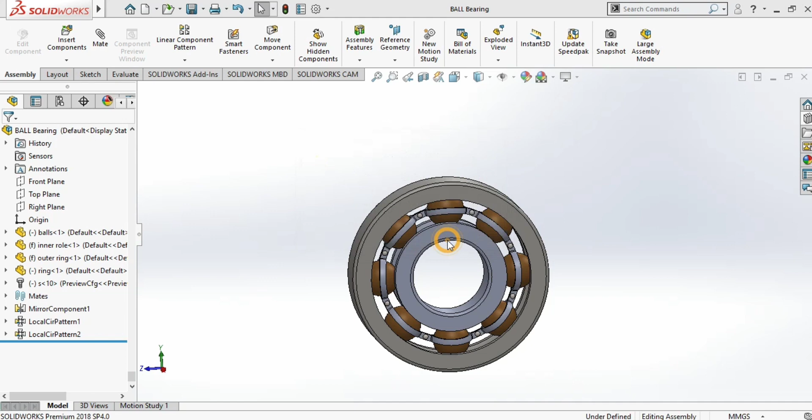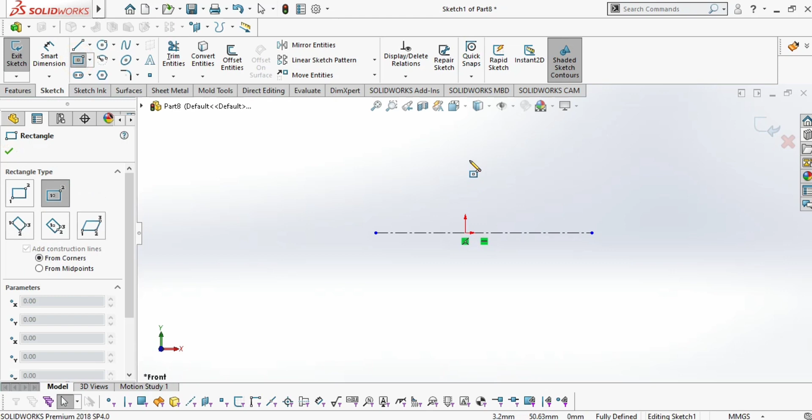Part. First I am choosing the front plane, then draw a center line. Then I am going to choose the center rectangle, give the relation vertical. Okay, then choose the smart dimensions.

This length will be 53, and the upper length will be 65, and the total length of this rectangle will be 31.

In this we have to revolved boss base. First there is a revolved cut in the inner side. For this choose first center line, draw a center line, then go to the center point arc and draw an arc, then go to the smart dimensions.

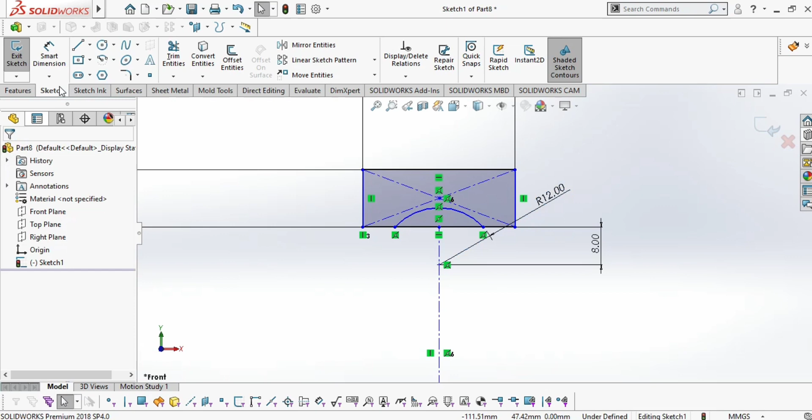This length will be 8. The radius of this curve will be 12. Okay, then trim the inner side portion and make relation to these lines equal and horizontal, then click OK.

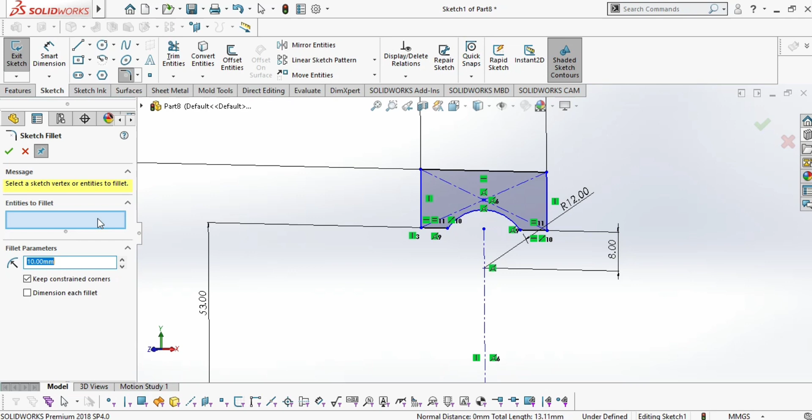Now we can also use fillets of 2.1 on these two upper sides, then click OK. Now exit the sketch, go to the revolved boss base and then give this axis, then click OK.

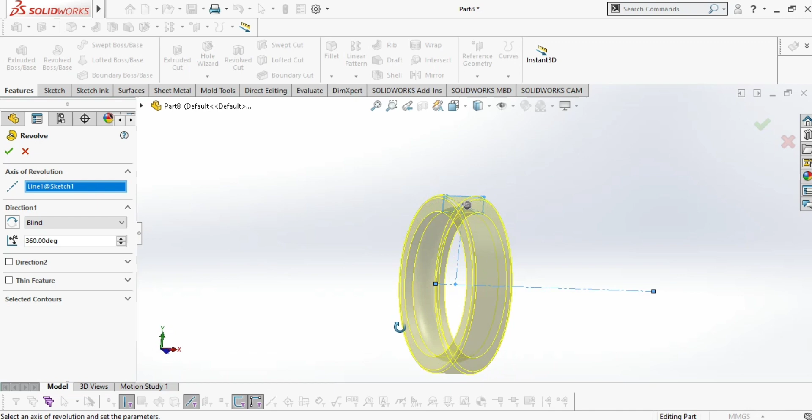Now this is our first part. We can also choose some sort of color. Choose this color, then I am going to next part.

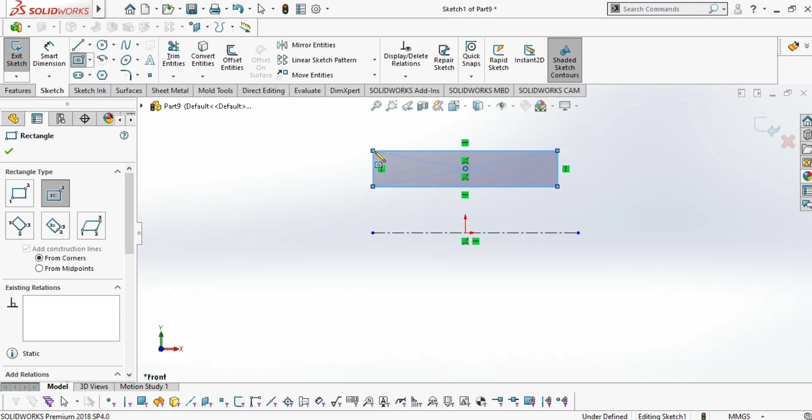Again choose the front plane, sketch. Again first draw a center line, now I am going to draw this center line, then go to the center rectangle and draw a rectangle. This vertical relation, then give the smart dimensions.

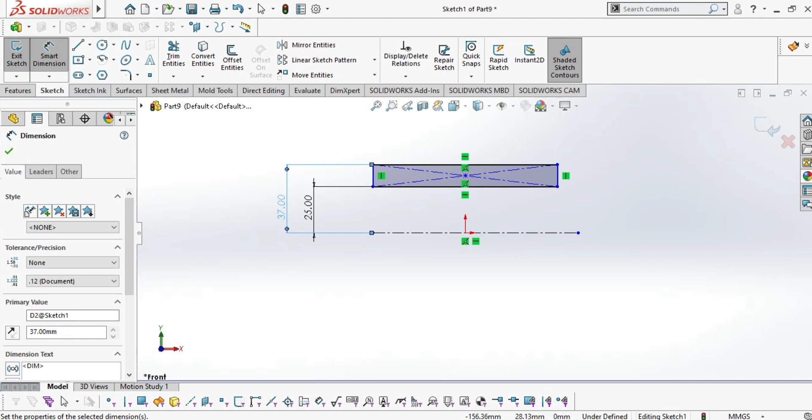The distance between this will be 25. This distance will be 37. Now and the distance of this will be 31.

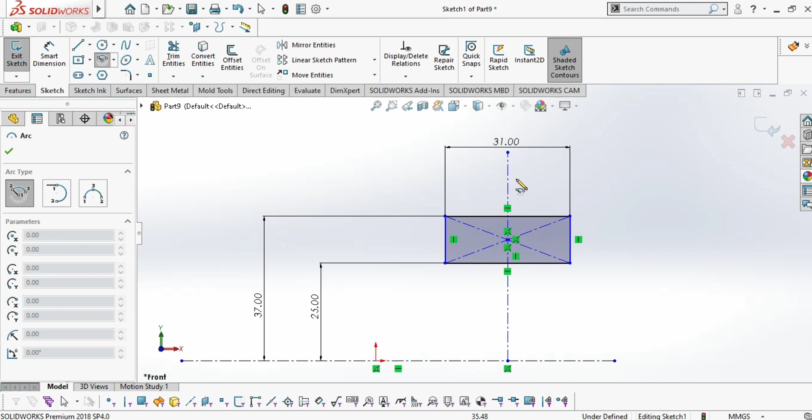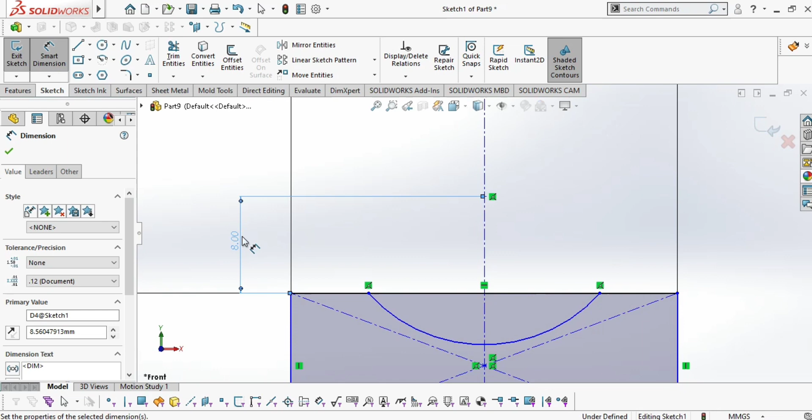Again we have to choose a center line, then again choose the center point arc, from this line, this point to this point. Again choose the trim command. First we have to give the dimension to this curve. Select this point and this point. The distance will be 8. The radius of this curve will be 12.

Now all okay. Now go to the trim, this unwanted portion, click OK, and select this line and this line to be equal and horizontal. Now click OK. Now exit the sketch.

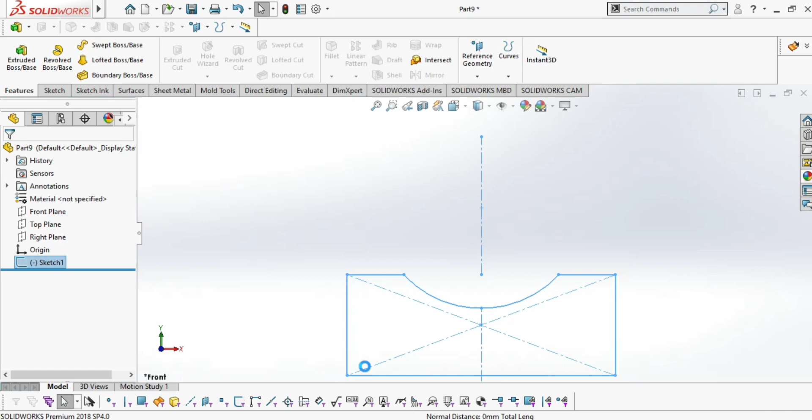First, then there is a fillet of 2.1 at this corner and at this corner also. Now click OK.

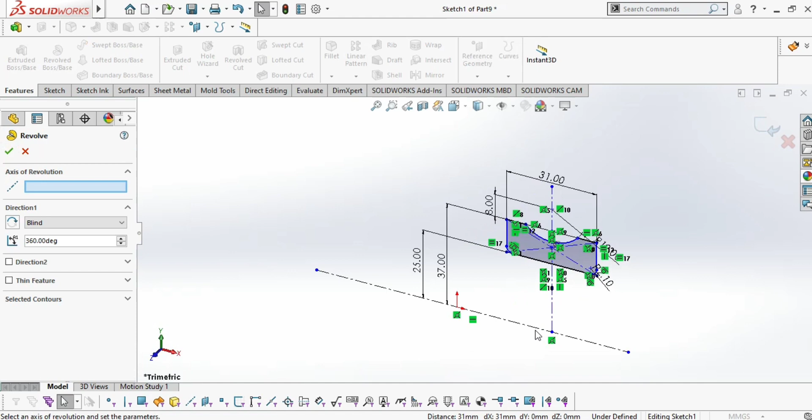Now go to the revolved boss base, give this center reference, then click OK. Now our second part is also ready. Then we are going to move on to the next part.

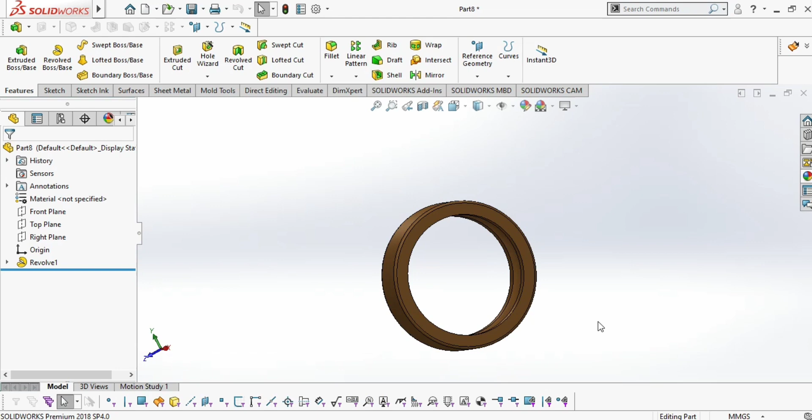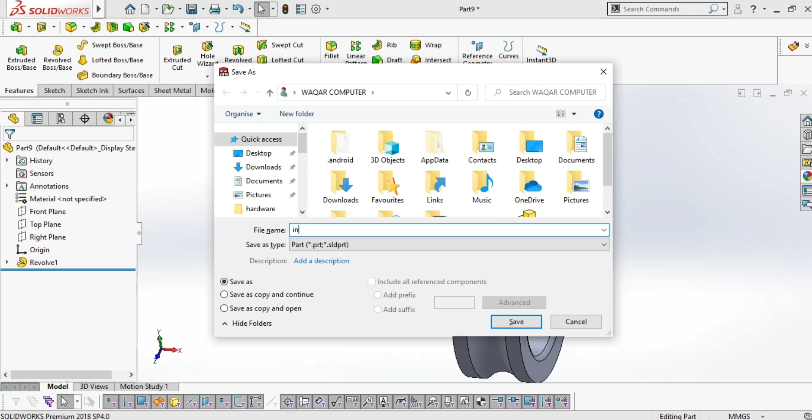First we have to save the earlier parts, as we can say, as outer ring. The next part will be inner ring, then the next part we have to again choose the front plane, sketch.

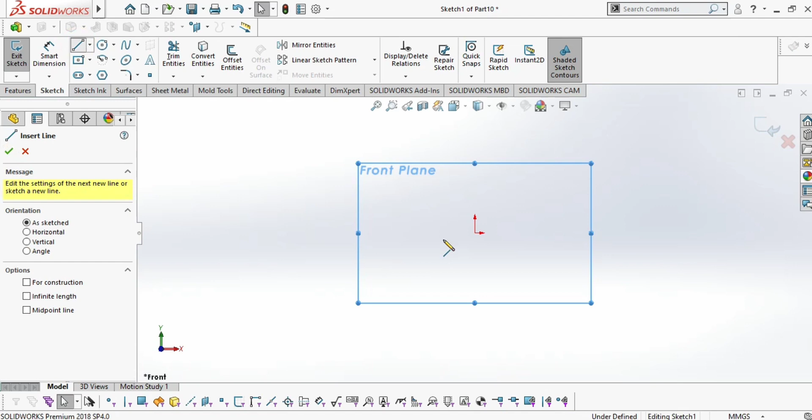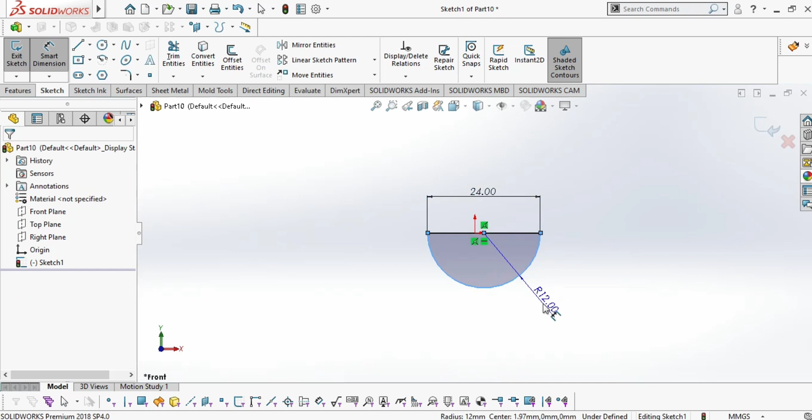Then I am going to draw a ball for this, starting from a line, draw a line going backward, then create a curve and join this endpoint. Then smart dimension, this will be 24 and the radius of the curve will be 12. Now click OK. Now go to the revolved boss base, select this reference, now click OK.

We can also choose the color of this ball. Now save this as ball.

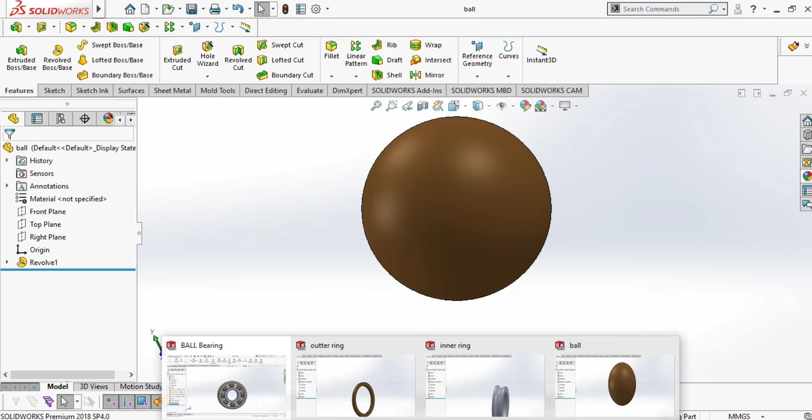Now again on the last part, again choose part, front plane, normal, sketch. First we are going to draw two circles, give them smart dimensions. First circle of diameter 86 and the second circle will be diameter 94.

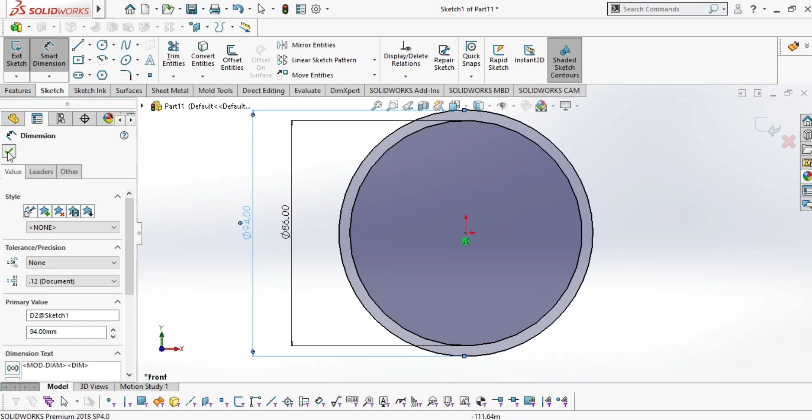Now click OK. Exit the sketch, go to the extrude boss base and give the total dimension of 16.

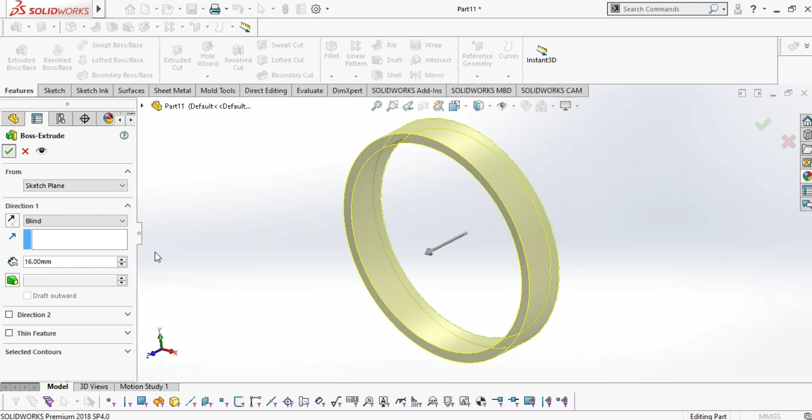Now click OK. Now again choose this plane, normal, sketch. Now again draw a circle, OK, smart dimension, this will be 90.

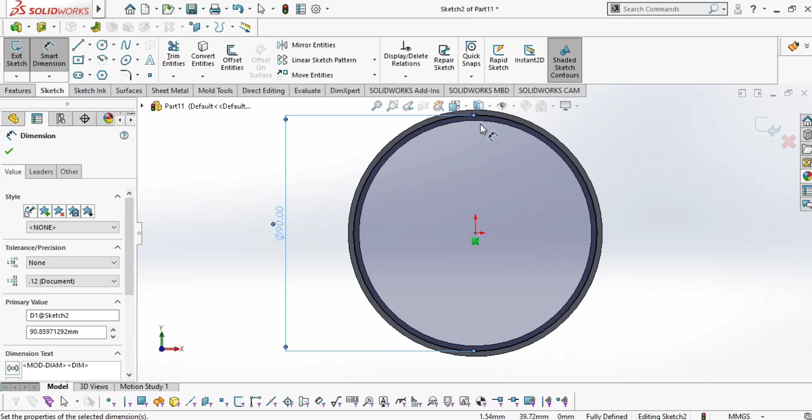Now first we have to choose a center line, draw a center line, then go to the line, draw a line and create a circle.

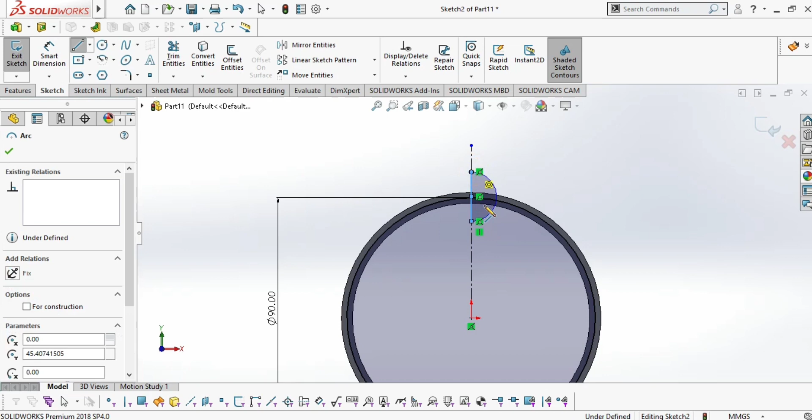Make some relation as this point to this circle will be coincident. Now click OK. Now give the dimension of this circle, will be radius of 12 and diameter of 24. Now click OK.

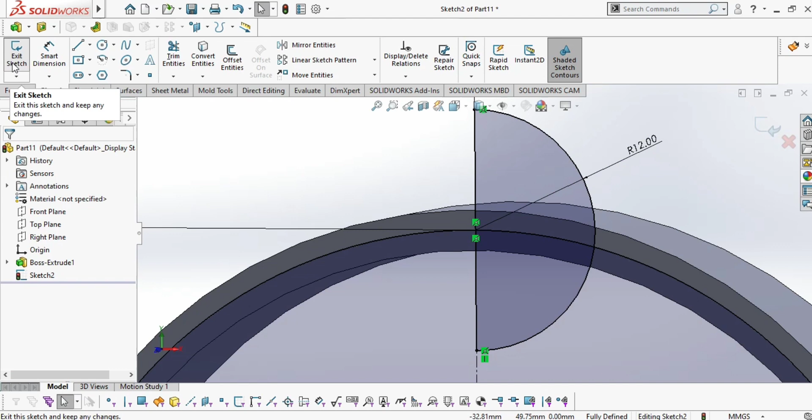Exit the sketch, then go to the revolved cut, give this reference. Now click OK.

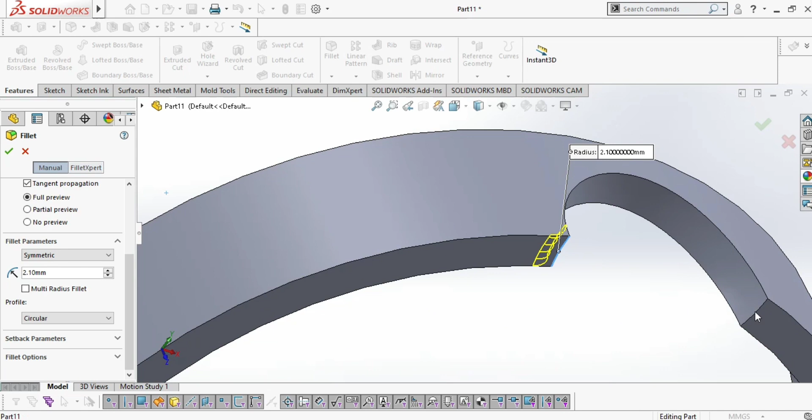Now we have to fillet these two corners. Now choose fillet, set the dimension will be 2.1, select this corner and this corner. Now click OK.

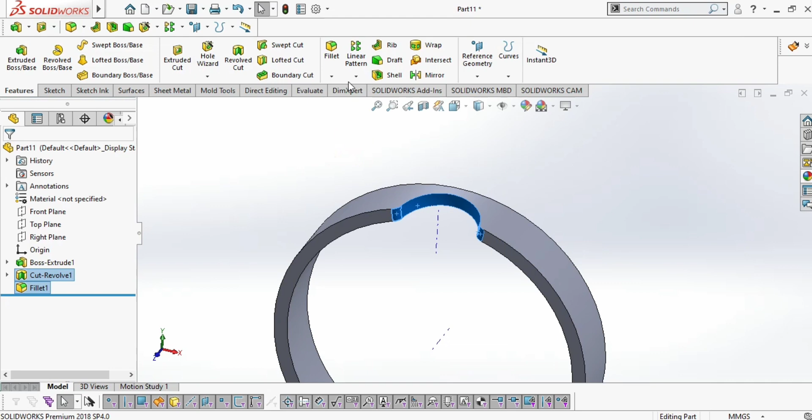We are going to choose 8 as the number of patterns for this. First select these 3 patterns, choose this temporary axis, go to the circular pattern, then choose this reference and give the total number of 8. Now click OK. As we can see, this pattern has been created.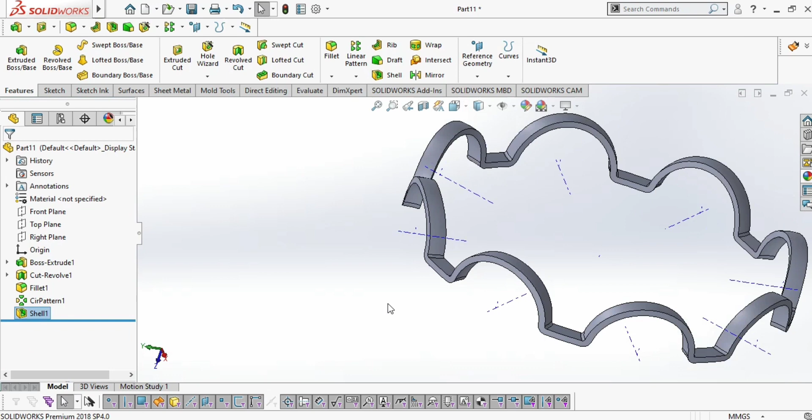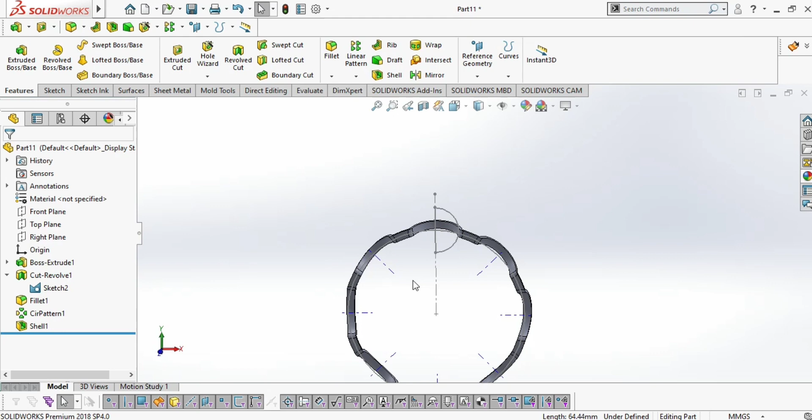Now we have to create this sort of pattern, a normal sketch. As we can see this, after we have chosen this cut revolved sketch, then select this plane normal and sketch, then draw a line touching this circle.

Create a circle, give the dimension. The dimension will be diameter of 2. Now again choose this line and this line, give the total angle between these two lines, which will be 22.5. Now click OK.

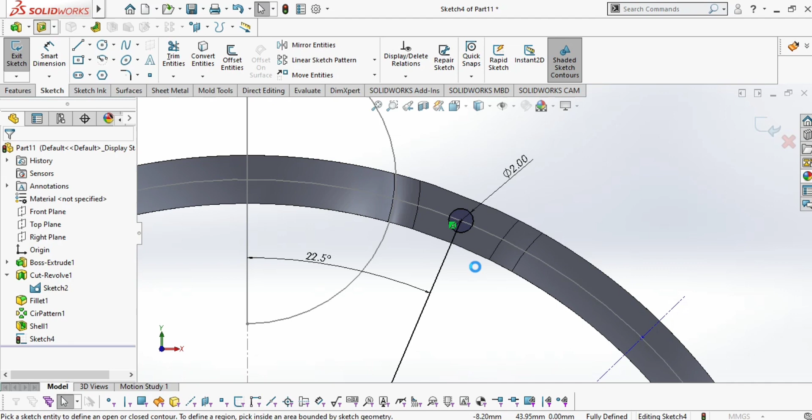Go to the extrude cut, select this circle through all, click OK. Now as we can see, this circle has been created.

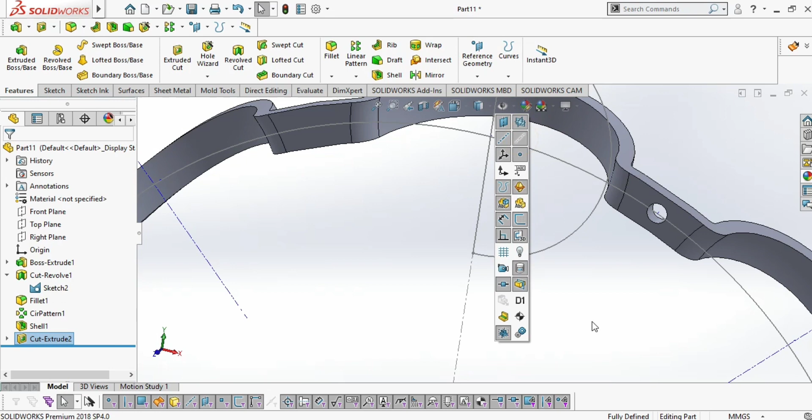Just the temporary axis, and then go to the circular pattern. This extrude cut is already selected. Then choose this reference. As we can see, there are 8 circles with 360-degree equal spacing. Now click OK.

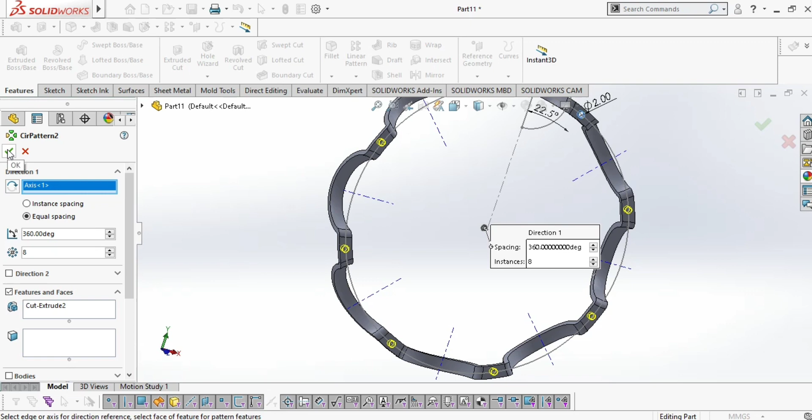Assemble all these parts. First we have to save the last part with the name of ring, or we can see this, give any name for it.

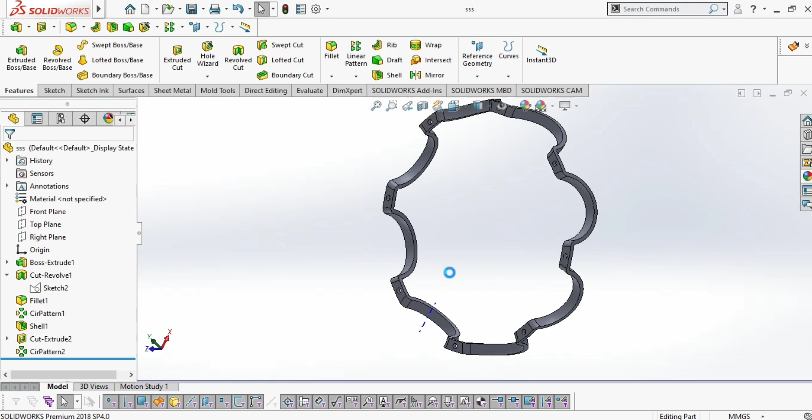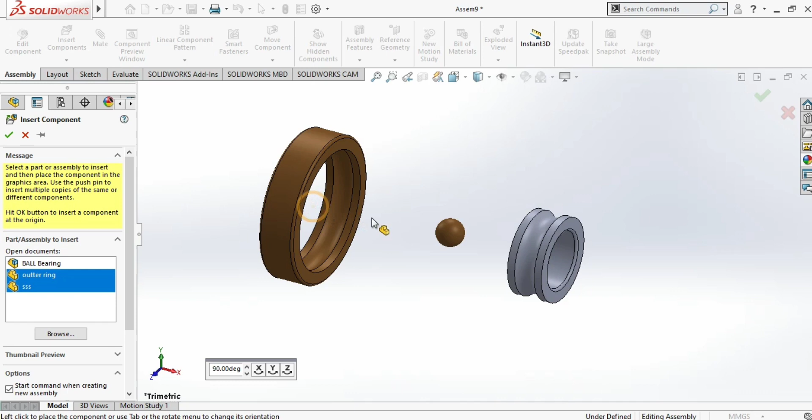So again choose assembling, insert components, choose all these components. Now as we can see, all the components are here in the assembly mode. Now we are going to assemble all these components.

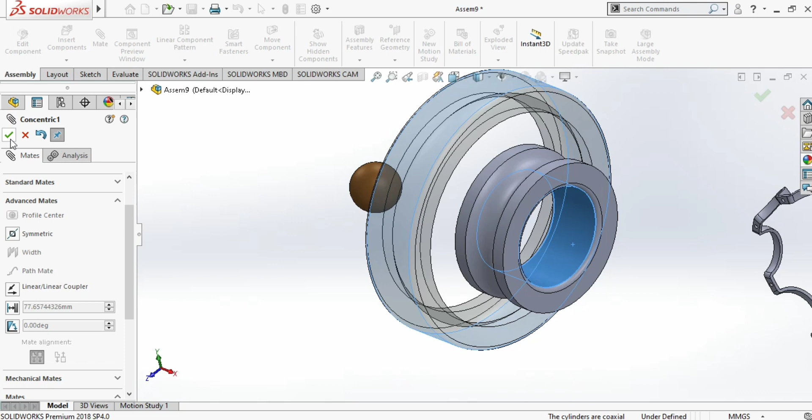First select this upper face and select this inner face, mate, then click OK, and then go to the advanced mates and choose the width. Select this face, this face, this face, and this face. Now click OK. As you can see, these are going inside.

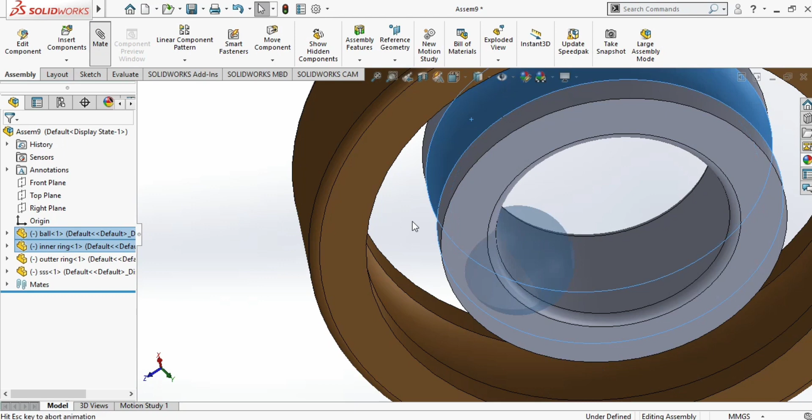Now we have to choose this ball, let it float, and choose this ball and the inner portion, then mate. As we can see, this flip mate alignment, this is going to be tangent to this. Now click OK.

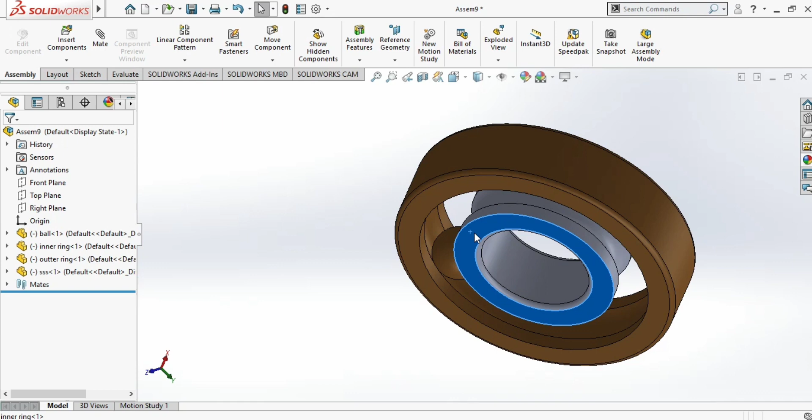As you can see, we have to select this part, fix it, to revolve this ball around this inner ring. So for this, we again have to choose the temporary axis, choose this center axis and this center axis, and select mate. Click OK. As you can see, these are going to mate.

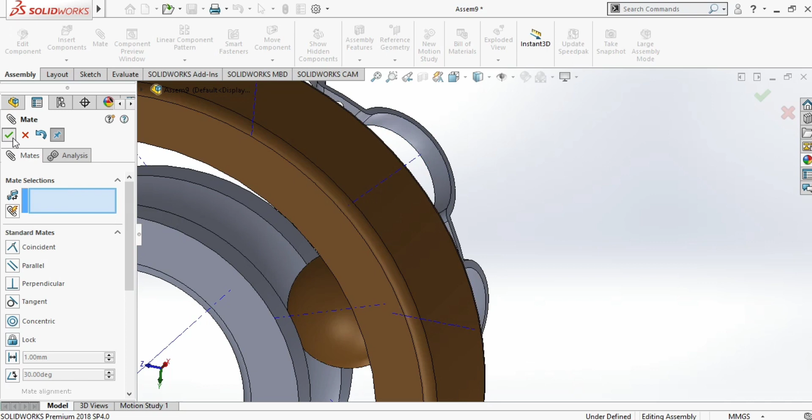Then select this face. Sorry, first we have to delete this. Click OK, then choose this face and choose this ball, then again choose mate. Now again, as we can see, this is going to perfectly mate.

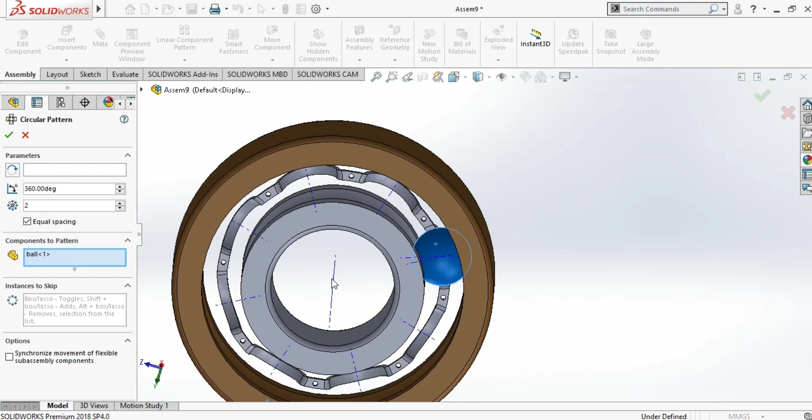Then, as we can see, there are 8 patterns of this ball. For this we have to choose this ball, go to the circular pattern, choose this reference, choose this reference and give the total number of 8 balls. Now click OK. As you can see, 8 balls have been created.

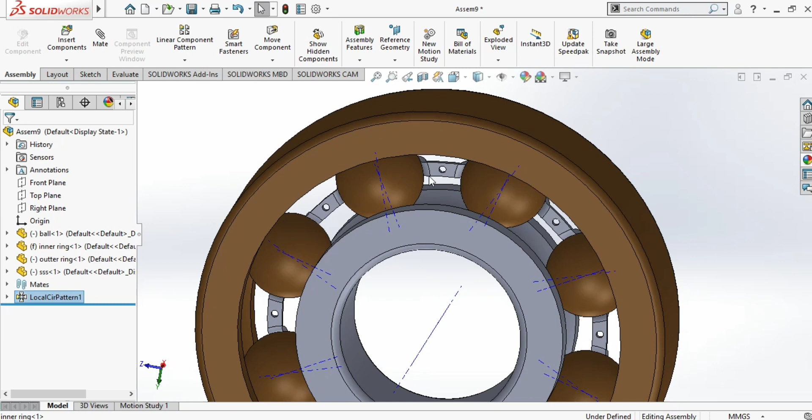Now we have to mirror this on the other side. For this we have to select this ring, go to the mirror option, select this face, go to next. As you can see, this has been mirrored on the other side.

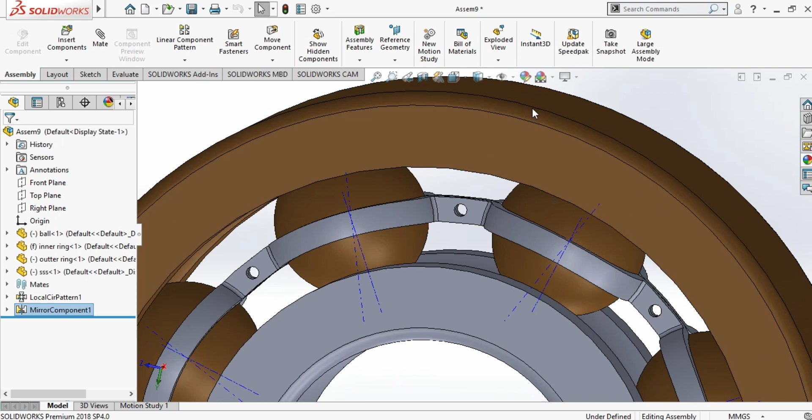Now unhide this temporary axis. Now as you can see, all the components are going to assemble. Then at last we are going to choose and create some sort of rivets around these.

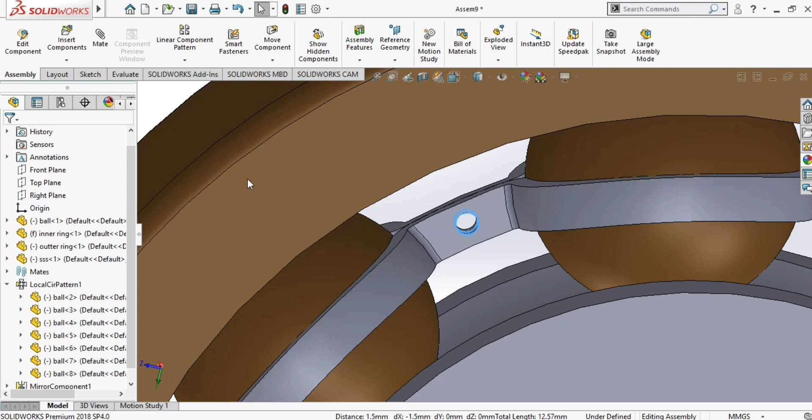For this, insert components, click this component, open, and select at this point.

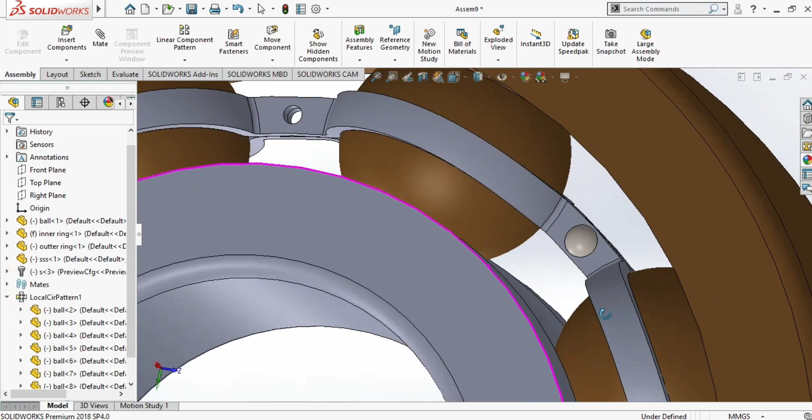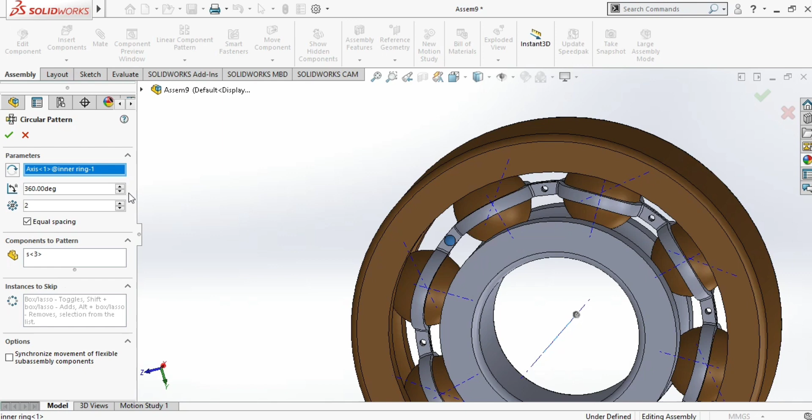Now we have to create 8 number of pattern. For this, first choose the temporary axis, then go to the circular pattern, choose this body, choose the reference point to be this, give the total number of 8 pattern. Now click OK. So as we can see, our ball bearing assembly has been created.

Hope you enjoy this video.